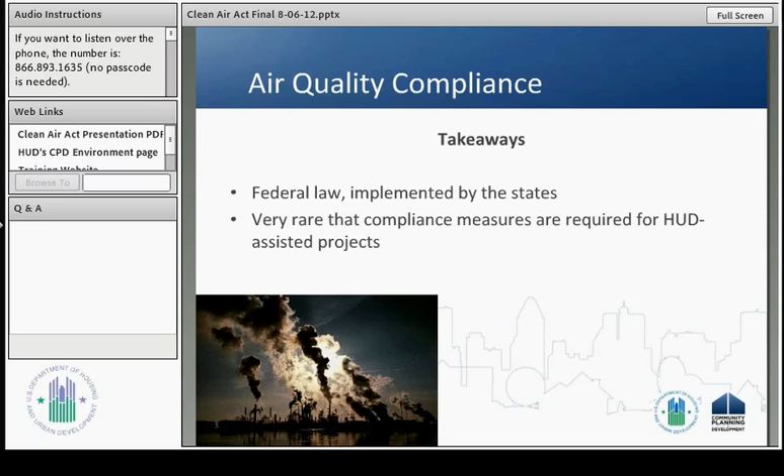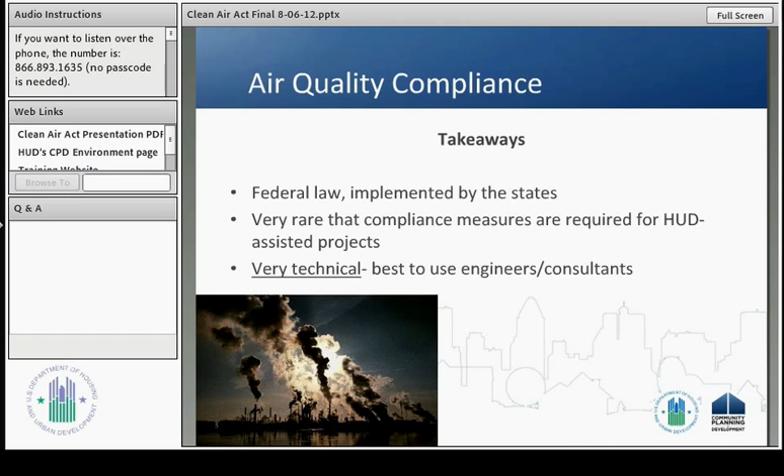Second, it is very rare that actual compliance measures are required for HUD-assisted projects. The emissions thresholds that require mitigation and permitting are generally targeted towards industrial operations. While it does happen that HUD-assisted projects have to take actions to comply with local Clean Air Act regulations, it is a very rare occurrence. That being said, when you do get to the stage where permitting and mitigation are required, it can be very technical, so it's best to use engineers and consultants to ensure accurate results.

Now, before we go any further, I'll provide you with a brief history of the Clean Air Act.

The history of air quality regulations in the United States follows the same general track as many other areas of environmental law. Our atmosphere was once considered a virtually limitless sink for unwanted byproducts of our industrial processes, and it was common to think that as long as your smokestack was high enough, there would be no consequences for human health. While advancements in science, a gradual uptick in the instances of asthma and other respiratory ailments, and headline-grabbing incidents of fatal smog led to the passage of the original Clean Air Act in 1970. Most of the relevant parts of the Act for our purposes were included in the original 1970 elements of the Clean Air Act. In 1990, the most recent amendments were added and included subjects such as acid rain, mercury, and other air toxics, but these apply mainly to industrial operations.

So for HUD-assisted projects, the original 1970 elements, which I'll go through in the next few slides, are the most important.

Now, the structure of the Clean Air Act is as follows. The regulations were written by the federal EPA, but as I mentioned earlier, it is largely administered through the state agencies. Each state has its own unique plan for meeting Clean Air Act goals, and these are known as state implementation plans. It's very important that you become familiar with your area's SIP, including the locations that are targeted for Clean Air Act regulations, the emissions levels that are allowed, and the mitigation that is required when those levels are exceeded.

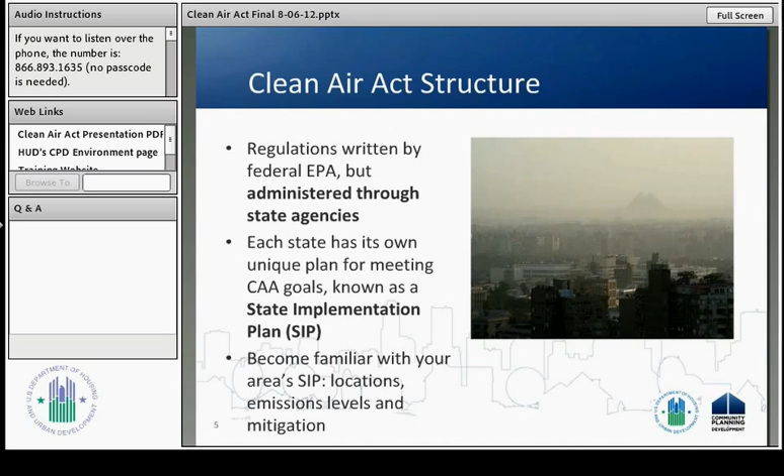Now, when reviewing your Clean Air Act compliance responsibilities, there are 4 easy steps to follow. First, you can determine if the project review rises to the level of environmental assessment or environmental impact statement, which is the next more involved level of environmental review. Anything below those levels, including exempt projects and projects that are categorically excluded, are generally not going to be the types of work that require Clean Air Act compliance.

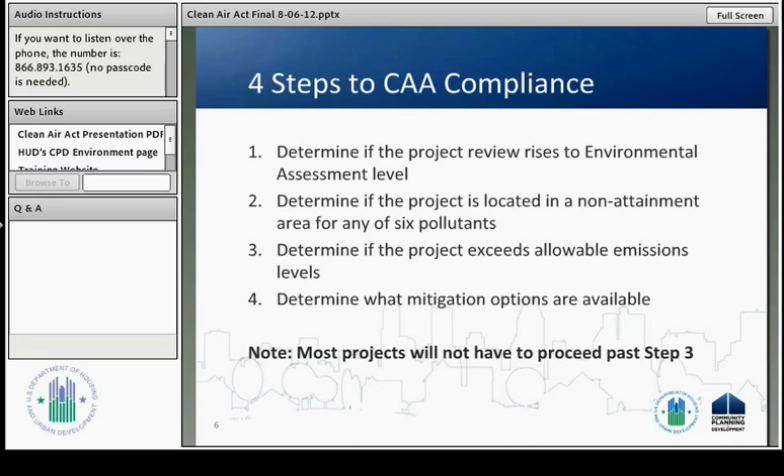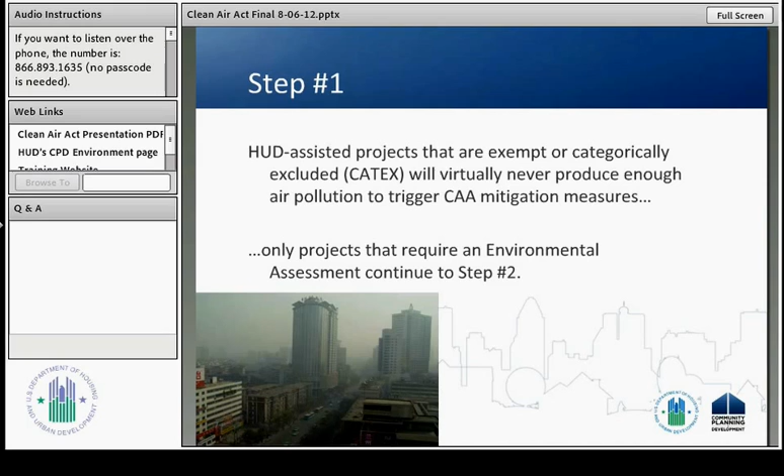So, step number 1. As I mentioned before, HUD-assisted projects that are exempt or categorically excluded will virtually never produce the types of emissions that will require Clean Air Act measures. So generally, only projects that require an environmental assessment or an environmental impact statement need to continue to step 2. Other projects can include a written determination in their environmental review record and move on to the next element of their environmental review.

Step number 2, determine if your project is located in an area that has excessive levels of these criteria pollutants. These 6 pollutants were originally selected in the 1970 Clean Air Act by the EPA as some of the most widespread and pernicious air pollutants for human health. And they are carbon monoxide, lead, sulfur oxides, nitrous oxides, ground level ozone, and particulate matter.

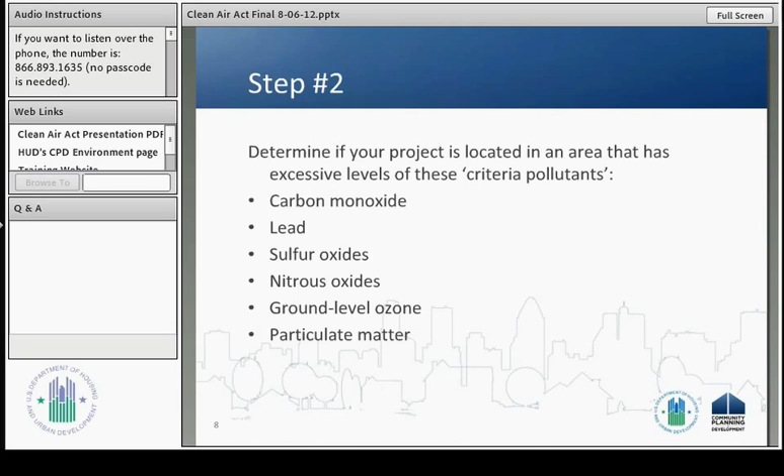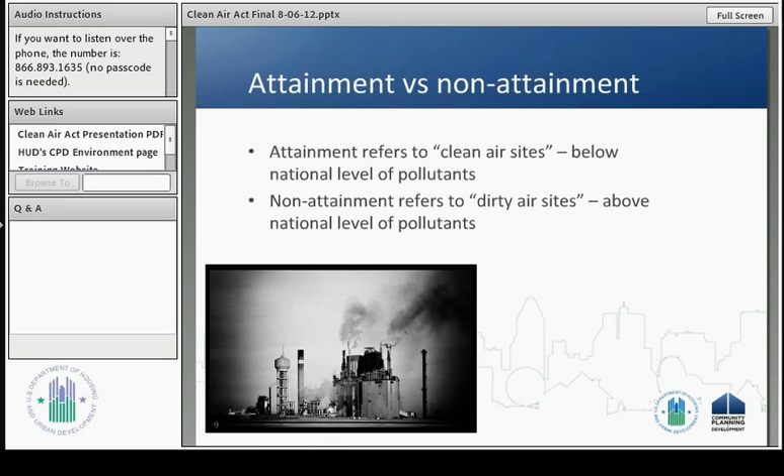For each of those 6 pollutants, either counties or metropolitan areas known as air quality districts are assigned attainment or non-attainment status. Now these terms are very simple. Attainment status refers to clean air sites, those counties or metro areas in which the overall level of the criteria pollutant falls below a nationally determined level that is deemed safe for human health. Non-attainment areas, on the other hand, refer to dirty air sites, those counties or metro areas in which the overall level of the air pollutant exceeds that level that is considered safe for human health.

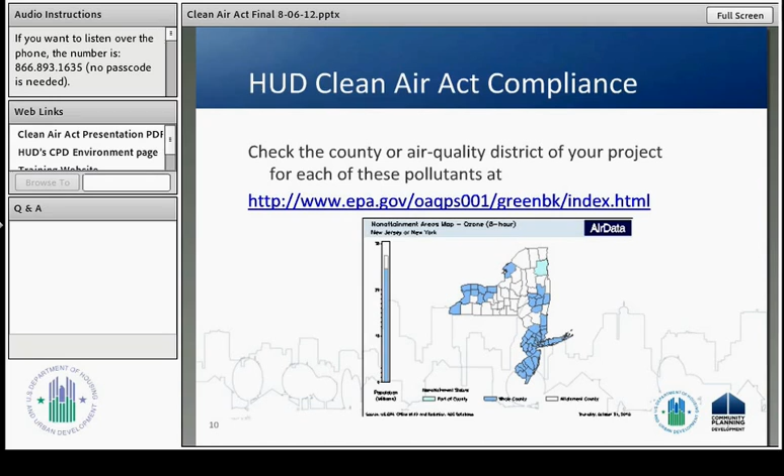I would recommend that every grantee become familiar with the attainment or non-attainment status for the geographic areas that you generally have your projects in. That way you can quickly, if you are in attainment for every single pollutant, then you never need to worry about Clean Air Act compliance, and you can just occasionally check in to make sure that your project location areas are still in attainment. And if you are in non-attainment, you'll know automatically which pollutants you need to be concerned about when you estimate your emissions in step 3.

So if you've determined that your project location is in attainment for all of these 6 criteria pollutants, you do not need to proceed to step 3.

If you are in non-attainment for one or more of those pollutants, you proceed to step 3 and estimate your emissions. Here's where familiarity with your local state implementation plan is so essential.

In some SIPs, formal estimates may not be necessary. There may be entire types of work that are excluded from further review because they don't produce the types of emissions that the state is concerned about.

Even if it's not directly spelled out in your local SIP, I would recommend that all grantees get in contact with your state air quality agency and with your local HUD environmental officer and try to come up with a list of types of projects that you can automatically exclude, because it wouldn't make sense to go through the emissions estimation process for the types of work that will never approach the emissions thresholds.

So if it is the type of work that does require estimates, it is highly technical and should be completed by a qualified professional, an engineering firm or a consulting firm that specializes in air quality emissions.

Once you have an accurate estimate of the emissions directly produced by your project, you should compare the estimated emissions to the allowable levels in your area's SIP.

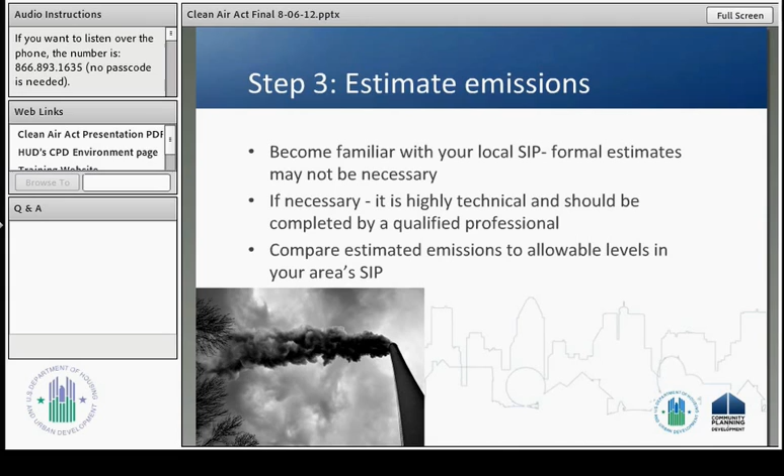And here's a good place to mention that we're only dealing with direct emissions for this from the construction and operation of your project. If you have an apartment building and it's going to lead to more utility expenditures and so perhaps increase emissions at a power plant located somewhere else, that is not of your concern for this type of compliance work. We're only concerned with emissions that are directly emitted from the site, either during the construction phase or during the operations phase.

Here's an example from the New York State implementation plan with what are known as de minimis emissions limits. These are the amounts of emissions for those criteria pollutants for which, if the project exceeds that limit, mitigation and permitting is required. You can see here the first 6 items on the table are our 6 criteria pollutants:

Carbon monoxide, nitrogen oxides, sulfur dioxide, particulate matters. Volatile organic compounds are a precursor to ground-level ozone and so are sometimes labeled as such instead of ground-level ozone. And finally, lead. And having done some crude rudimentary calculations of my own using emissions factors and common utility usage rates in the Northeast...

I came up with rough estimates for the amount of square footage that you would need to heat in order to reach some of these emissions levels. And it totals in the millions of square footage, enough to heat the equivalent of 3 Empire State Buildings. So just for your reference, that's the type of emissions that are going to be required to lead to mitigation actions.

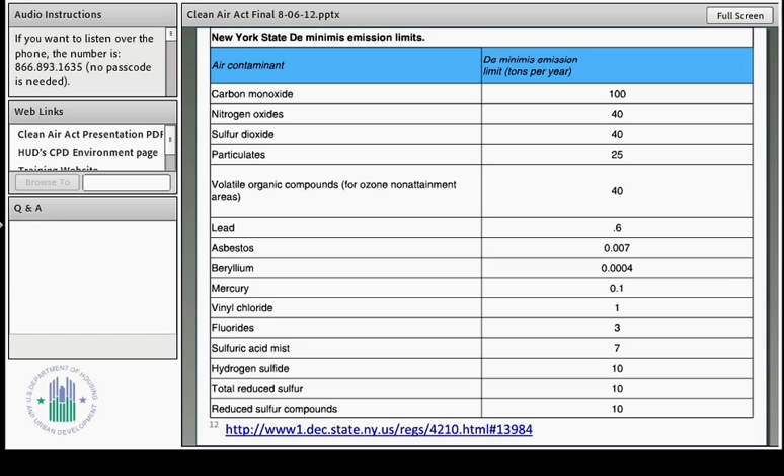And again, that's only for direct emissions from the site. So you'd have to have a cogeneration plant or some sort of auxiliary boilers that are directly producing the emissions in order to worry about this.

To give you a sense of how some other SIPs determine their screening levels, I've included the Bay Area in San Francisco. Their Air Quality Management District has a table of various building usages and the various units that are used to determine whether the project requires further investigation or not.

For instance, single-family units and apartment buildings are given a number of dwelling units. That's what DU stands for in this chart. Elementary schools can be determined by the number of 1,000 square feet or the number of students.

And you can see on page 2 of the table that, for instance, hospitals are screened off by the number of beds that they have, or the number of employees in industrial activity. So that's another method that some local areas use in their SIPs to screen out projects for further study or mitigation.

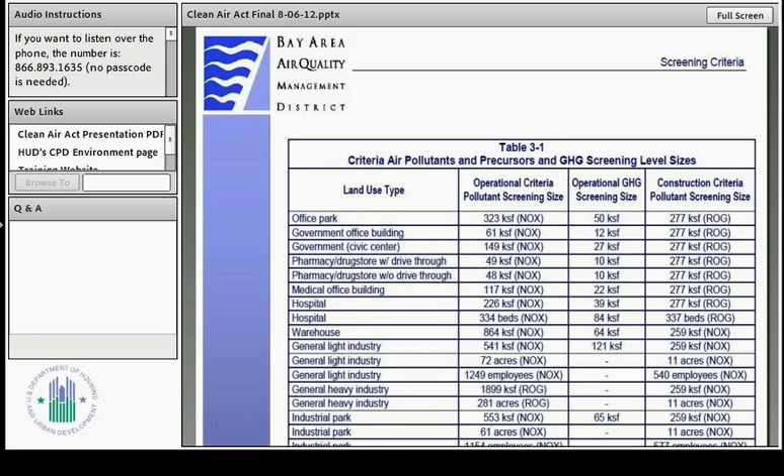Now, as I said, the vast majority of projects are not going to have to proceed past step 3. They're either going to be CENST or exempt from environmental review. They're going to be in an area that's in attainment for all of the criteria pollutants, or very commonly, they'll be in a non-attainment area, but they'll be the type of work that does not require mitigation, or their estimated emissions will be shown to be below the local thresholds.

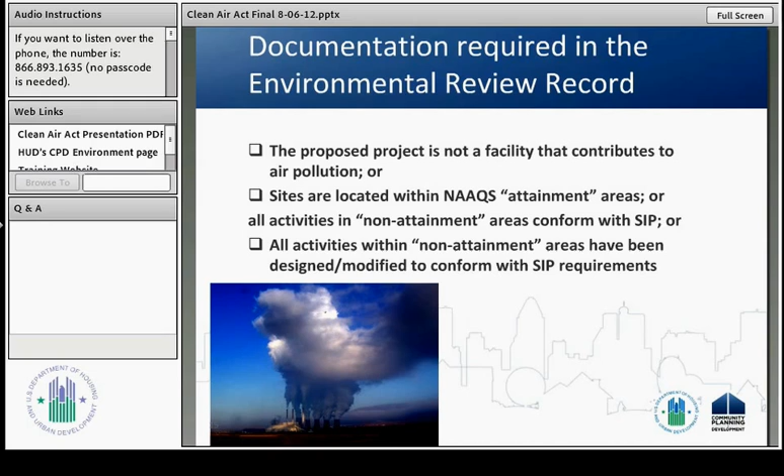For those projects, you will just apply a written statement in your environmental review record indicating which of those 3 items excludes you from mitigation or permitting under the Clean Air Act.

Finally, if you do have the rare project that requires mitigation and permitting action under air quality compliance regulations, the mitigation can come in several different forms. The most common is emissions reduction technology. This can either be specified technology, which generally includes various methods for capturing the pollutant on a solid or a liquid substrate and then shipping that substrate off-site and disposing of it in an environmentally sound manner.

It can also include best management practices that reduce the amount of emissions produced in the first place. For instance, if you have a cogeneration plant on your site, you can burn your fossil fuel at a lower temperature to produce less nitrogen oxides, for instance. And those can be very technical and very specific, so at that point you need to work with a consultant to figure out exactly what best management practices can be applied.

Certain SIPs also allow for emissions offsets, either in the form of purchasing emissions credits from other facilities that may have done an especially good job of reducing their emissions and therefore earned credits that they can sell to a buyer, or directly shutting down existing sources. For instance, a lot of times new coal-fired power plants will purchase and then shut down older, dirtier boilers to justify the emissions that they will be emitting.

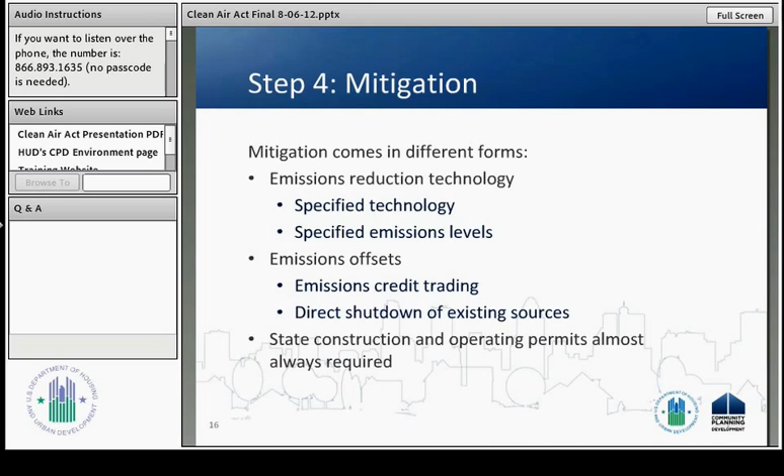Finally, state construction and operating permits are almost always required for these projects, and that can be a somewhat lengthy technical paperwork process. So again, we recommend consultants to help through with that process. So with that, I will hand the presentation over to Nelson Rivera, who will talk a little bit about asbestos regulations and a couple of case studies.

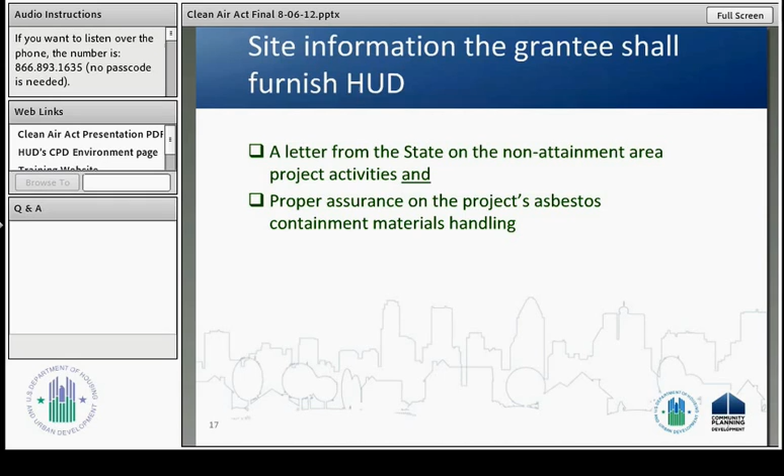The second bullet basically encompasses that all project asbestos containment materials will be handled and disposed of by a certified professional in accordance with applicable United States Environmental Protection Agency and state requirements. Next slide, please.

Case study number 1, the Miraflores concept plan, is to provide 336 units of a range of housing types on this urban infill site. Key components of the plan are as follows: provide a mix of affordable and market rate housing, both rental and owner-occupied units, on the Miraflores site. The affordable component will consist of 110 rental units for seniors. There will be 222 market rate attached units in a combination of townhouses and single-story residences, and 4 single-family homes.

Also to provide open space as a buffer along Interstate 80, providing approximately 4 acres of open space. In addition, a small park and a tot lot will be allocated in the center of the site. Other objectives include incorporating historic features into the site, preserving historic structures, and restoring the ensemble of the primary Sakai House, adjacent water tower, and greenhouse 20, and the primary Oishi House on site. Also, to create a permanent, accessible, interpretive exhibit displaying the history of the Japanese American flower growing community, and to incorporate design elements that celebrate the history of the site, such as naming of the streets, a proposed pedestrian bridge, flowers, and landscaping.

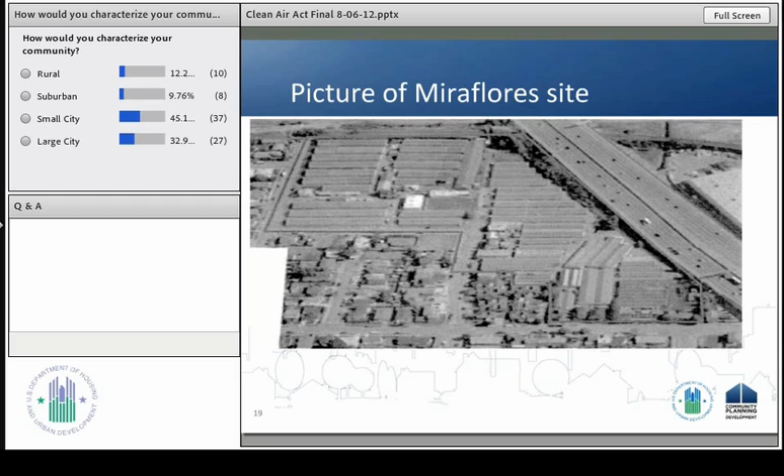The physical setting, as far as existing conditions: the site is an irregular, almost L-shaped 14-acre property comprised of 3 major parcels: the Sakai Nursery, the Oishi Nursery, and the Endo Nursery. The site is generally flat with a slight slope toward the Richmond Greenway at the north side. Surface elevations range from 50 to 60 feet above mean sea level. There's significant overgrowth and debris on the site, and traffic from I-80 could be heard through the property, though some block views of traffic.

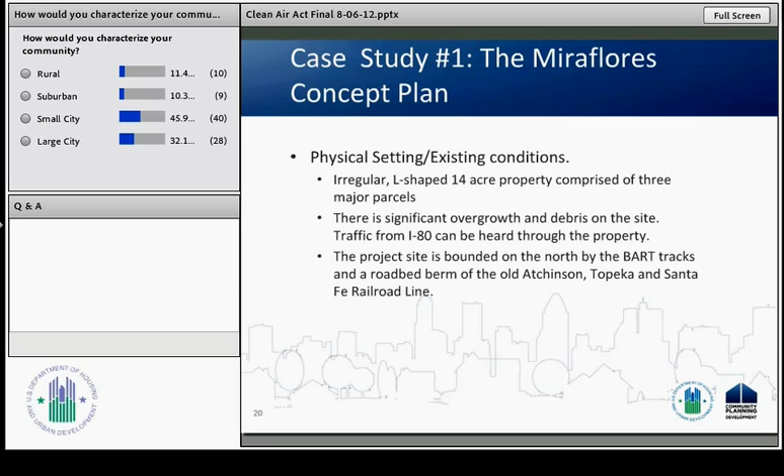The regional location: the city of Richmond is situated in western Contra Costa County, east of San Francisco, north of Oakland. The Miraflores site is located in the Park Plaza neighborhood on the east side of the city. The site is approximately half a mile directly northwest of the El Cerrito del Norte BART station, which is located on Kearney Street between Cutting Boulevard and Hill Street in the city of El Cerrito.

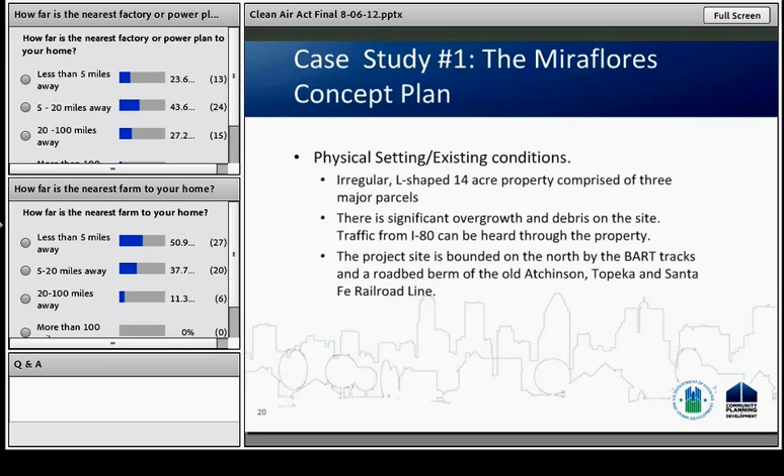The local setting: the project site is bounded on the north by the BART tracks and the roadbed berm of the old Atchison, Topeka, and Santa Fe rail line. From the roadbed berm, the west project boundary runs along south 45th Street, and east along Florida Avenue south on 47th Street. Next slide, please.

As far as air compliance issues, on December 28, EPA designated the entire Bay Area as non-attainment for 24-hour PM, as particulate matter 2.5 of the NAAQS. Violation of the NAAQS at the Vallejo and San Jose stations prompted this action. The final EPA order formally designating the Bay Area as non-attainment with the federal particulate matter 2.5 standard was scheduled to become effective in April 2009. However, President Barack Obama has put a freeze on new federal regulations enacted by the previous administration, so the effective date for this designation is unknown.

Assuming the designation takes place soon, the Bay Area will have until 2012 to comply with the standard. At the state level, the region is considered serious non-attainment for ground level ozone and non-attainment for particulate matter 10 and particulate matter 2.5. As noted earlier, California ambient air quality standards are more stringent than the national ambient air quality standards, and this region is required to adopt plans on a triennial basis that show progress towards meeting the state ozone standard. The area is considered attainment or unclassified for all other pollutants.

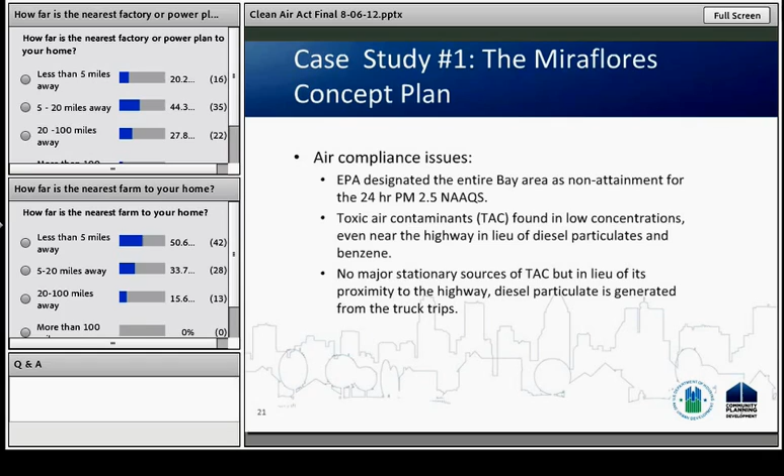Toxic air contaminants are regulated by regional, state, and federal levels. Diesel exhaust is predominant toxic air contaminant in urban air and estimated to represent two-thirds of cancer risks overall. In this case, diesel exhaust is a complex mixture of gases, vapor, and fine particles.

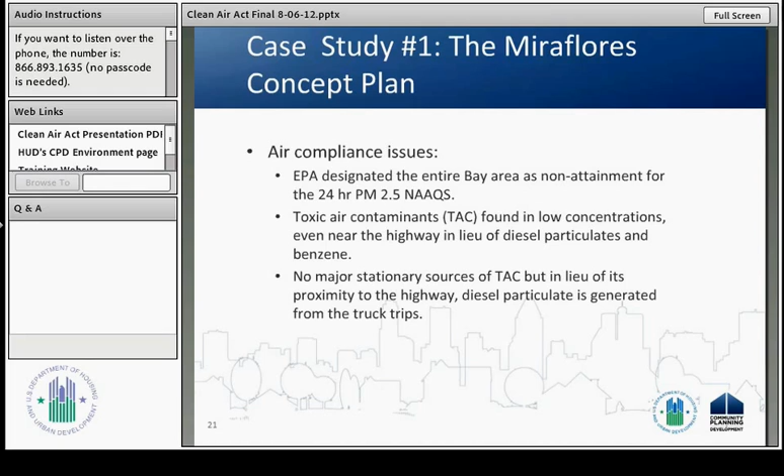Originally, the proposed building was set back 20 feet from the highway, the distance from the roadway and truck traffic densities being a key factor affecting the strength of association of adverse health effects. As a mitigation measure, this project was actually pushed back 220 feet in order to take care of the amount of debris and particulate matter coming from diesel production from trucks into this project.

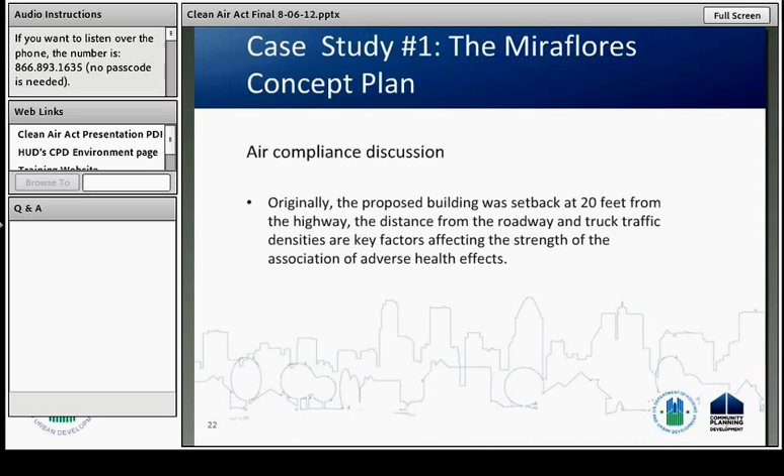In addition to that, there's other mitigation that we're going to cover in this presentation because of the amount of truck traffic that was diesel generated. Next slide, please.

In addition, the system for the whole mitigation system will have MERV air filters. These are high efficiency filters to remove 90% of ambient particulate matter 2.5 from outdoor air.

The city, as successor agency, is working on completing the cleanup for the site. The abatement and demolition work has been completed, including the moving of historic structures to be preserved. They've also fully entitled an 80-unit low-income senior housing development as a portion of the site.

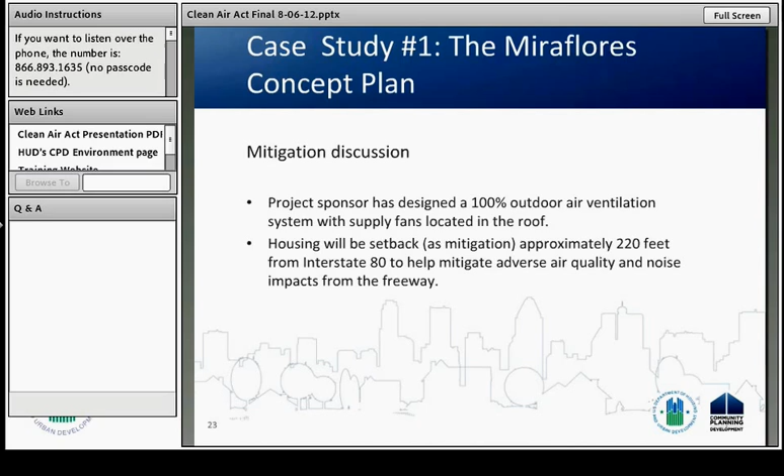The city has also received an urban greening project grant to establish the green belt, which includes daylighting a portion of Baxter Creek. Next slide, please.

As far as case study number 2, which is the 6th and Oak Apartments in Oakland, the physical setting conditions are: the project is located in the northern corner of the intersection of 6th and Oak Streets in Oakland.

And again, we have another major arterial road, which is Interstate 880, passing on the project side parallel, and on the opposite side of 6th Street. And the air quality requires qualified...

consultants to prepare a health risk assessment to develop measures to achieve acceptable interior air quality. This includes sensitive receptors, which are like nursing homes, schools, parks, people on the outside, or facilities or structures close by to the actual road that can be heavily impacted by whatever goes on the road that produces particulate matter and other air pollutants and contaminants. We'll cover those during this briefing as well.

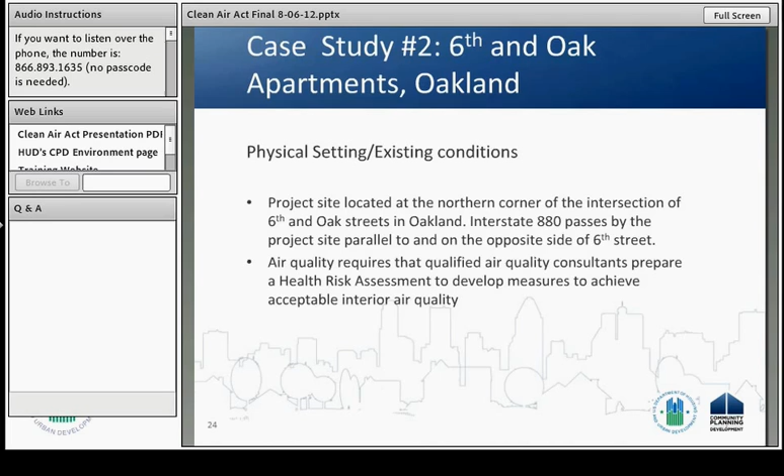Next slide, please. That's a picture of where the project is located at. You see the Interstate 880 and Oak Street intersection over there, along with all the other buildings.

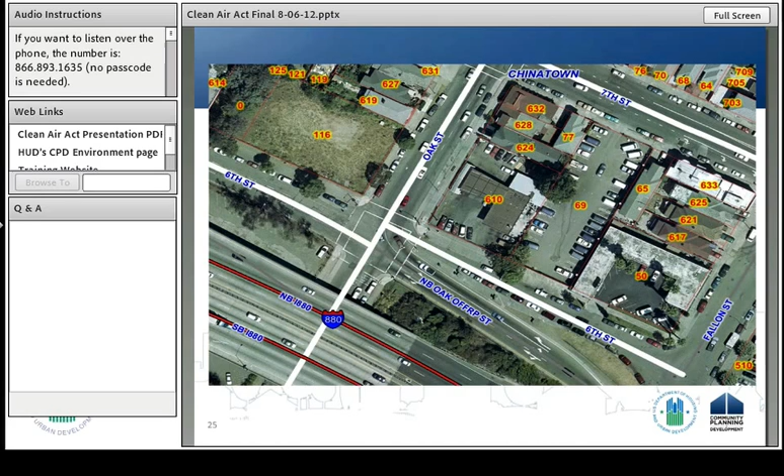Next slide, please. As I said previously, air compliance issues include the potential exposure from emissions of the adjacent freeway, exposing residents to vehicle emissions, including toxic air contaminants. This is mainly the diesel emissions involved in this. Next slide, please.

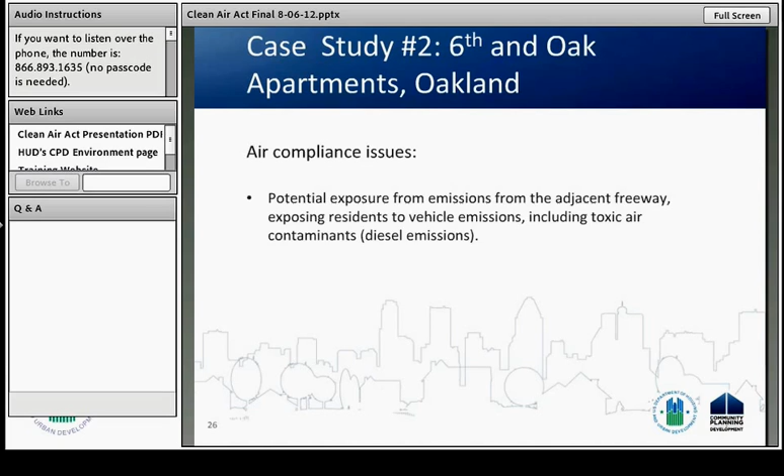As far as the mitigation discussion for this project, to take care of the particulate matter and diesel contaminants coming from the road, there are no sensitive receptors near entry or exits of the proposed project site. Sensitive receptors include schools, parks, playgrounds, nursing homes, and similar places.

Sensitive receptor in the same building with hazardous materials - this refers to inadvertent release of hazardous materials that could enter the environment in the air, like waste motor oil, cleaning fluids, etc.

The installation, operation, and maintenance of HVAC - heating, ventilation, and air conditioning system - and MERV 13, these are high efficiency filters typically used in institutions requiring very clean air, such as hospitals, operating rooms, and clean air sensitive commercial buildings. Usually the airflow restriction in this filter is not like the one you'd put in a normal home, because of the restriction the filter provides to the system. So it's only used in certain applications.

And then maintain positive pressure within the building. Positive pressure as a definition implies a sealed room, usually an anteroom, to facilitate the donning of protective clothing, with airflows of at least 12 air exchanges per hour. That means exchanging that air to be really pure before it's used and recirculated inside the main cabin or main room where operations are being done.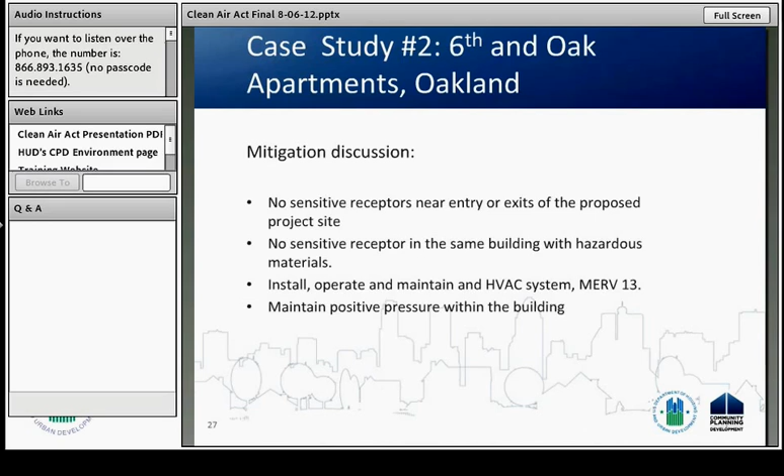Well, that's my last slide, and we're ready to take some questions.

While we're waiting for questions to come up, the case studies you presented, Nelson, reminded me of an important point. There are two separate things to think about with air quality: the direct emissions from the site itself, which we've largely discussed in this presentation, and then for projects doing an environmental assessment, as part of site suitability review, you should be looking at potential sources of air pollution near the site that could affect it.

So although our Clean Air Act regulations do not require you to consider outside sources of air pollution that may affect residents and other occupants of the building, as part of an environmental assessment and consideration of site suitability, that should be something to look at.

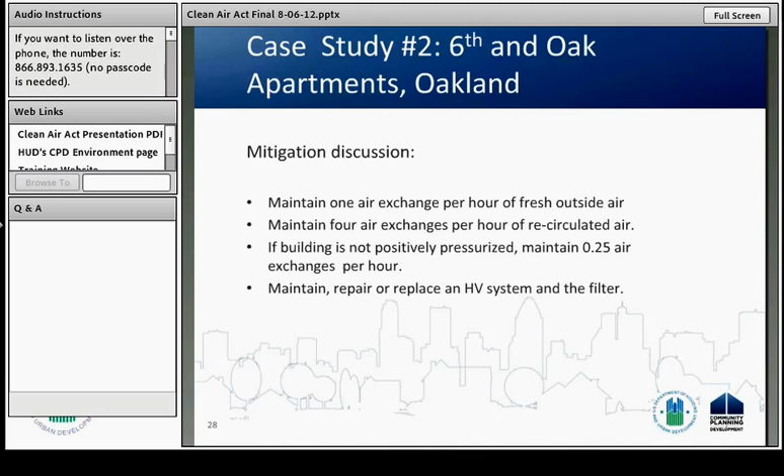Okay, I'll answer the next question. The questioner uses an example out of Augusta, noting that a previous individual working on the statutory checklists for HUD environmental reviews said that Augusta is an attainment area. The questioner asks what this term means, and is it an accurate explanation for projects in our area?

So again, I'll emphasize that attainment areas are the clean air areas that have been determined to have levels of those six criteria pollutants considered safe for public health. The non-attainment areas are the dirty air sites that have overall emissions levels considered unsafe for public health. To determine whether Augusta specifically, or any county or metro area in general, is attainment or non-attainment...

There is a link on slide - let me review the presentation here to confirm - it's slide 10. There's a link to an EPA website where you can go through each of the six criteria pollutants and see a list of all the counties and metro areas that are in non-attainment. It's organized by state and then by metro area, so it's very easy to navigate and find if your particular area has excessive emissions and whether you need to estimate your project's emissions.